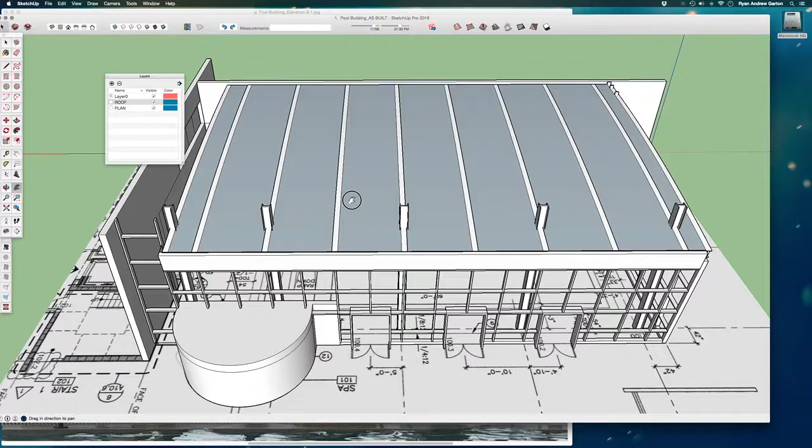Let's hide our roof by unchecking the roof layer. And now we can put the layers away for a moment.

So we're going to work on getting these exterior doors in place. And if we look at the photos, we can confidently say that all of these exterior doors are the same. We're not going to get into an insane amount of detail here, but we are going to make one door as a repeat component that we can use over and over again.

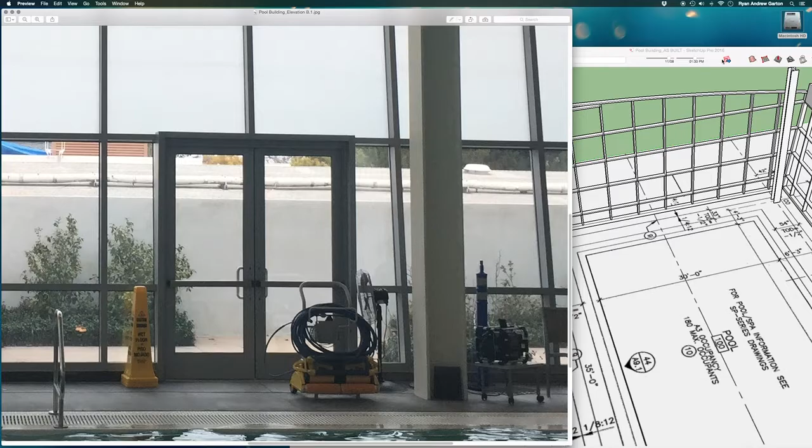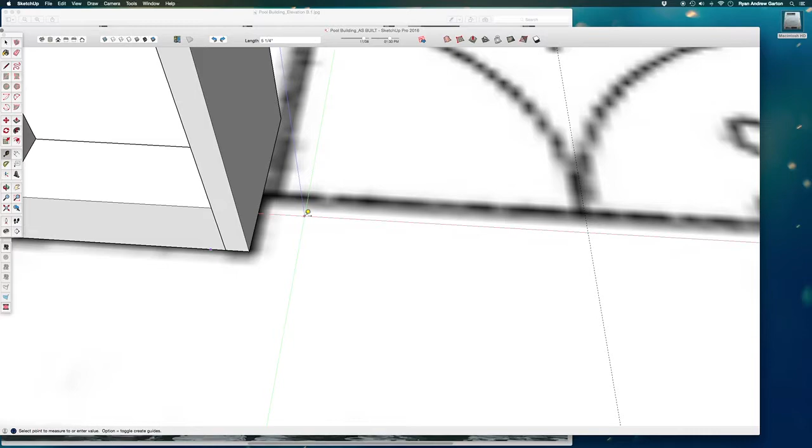So let's go back to our model, and we can just start at any point. I'm going to start with this door here. Using my tape, I'm going to pull a guide out 3 feet, enter. Then I'm going to use this line as a reference to pull a guide back, and I'll just say 5 1/4 inches. Let's go ahead and make the door 1 and 0.75, so 1 3/4 thick.

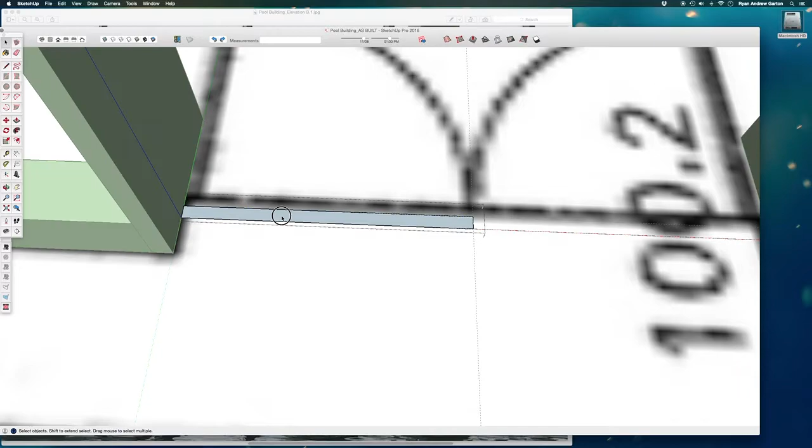Using the rectangle, go ahead and trace along that guide. Double click to select this, make it a group, and G. Double click to open it up again, P for push pull, and push pull this up into place.

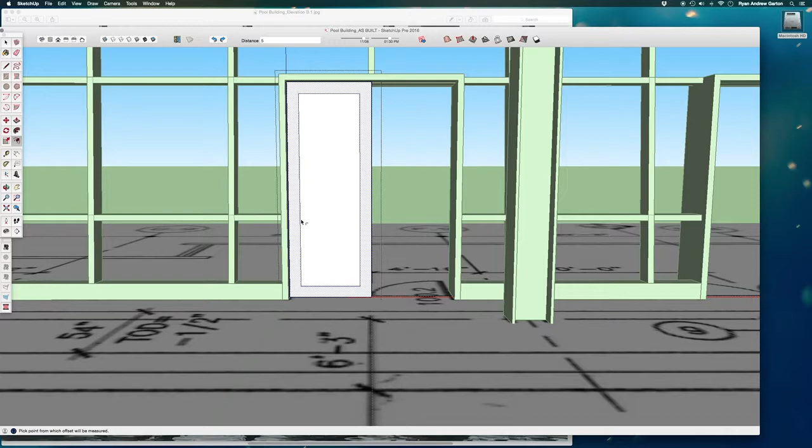Okay, now I'm going to open this up again, and I'm just going to offset this. I'm just going to do this visually because we've done a lot of work already. So let's make this 5. Select this line and just move it straight up, and we're going to move this up an additional 4 inches. Let's move it up an additional 5 inches. Notice I typed 4, enter, and I was still able to type 5, enter afterwards because I hadn't done anything else yet.

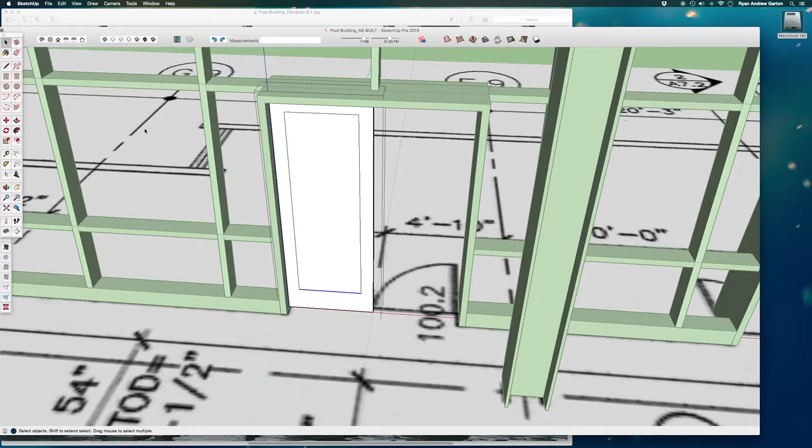All right, now we can push pull this away, click. Now I'm going to select, and that's done. So this is part 1. Now I need to put some glass in it.

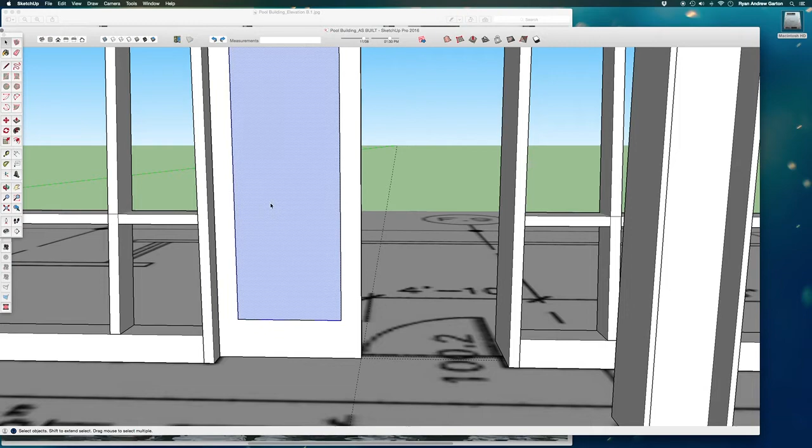So a rectangle from point to point. Double click on that, make that a group, and go ahead and move that in slightly. Let's just say 0.5.

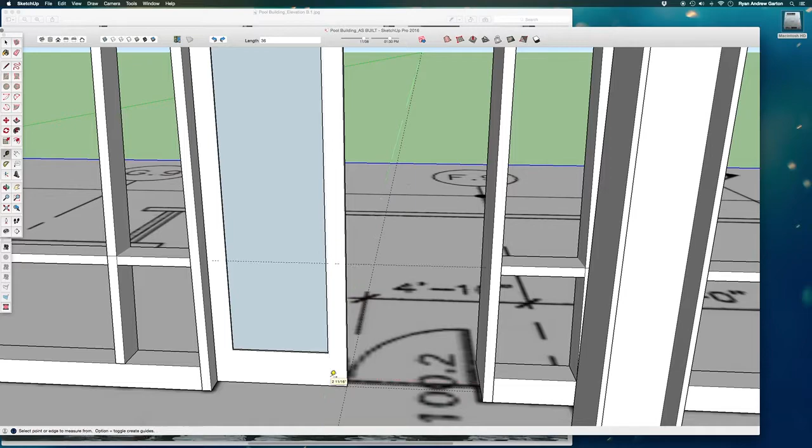Now I'm going to find my center line. I'm just going to graphically put a push bar in here. I'm not going to get really that invested in the detail of this. So I'm going to drag this up 36 inches. Let's do that again. 36, enter. So I've got a little line there. And I'm just going to eyeball along the center of that a rectangle. Double click and make that a group. Open that up, push pull.

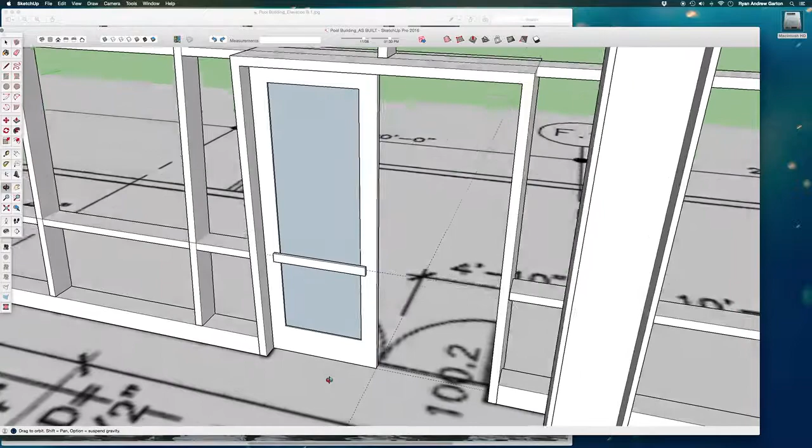Okay, that's basic. We're not worried about materials yet. We're going to get into that soon enough. So this is basically my door. I've got the frame, I've got the push bar, and I've got the glass on the inside.

The last thing I want to do, because eventually I want to see this model in plan, is give myself a little swing. I want to see what this looks like when I look at this in plan. I want to see the door swing. That's why I love this tool. There's these new pie tools and these new arc tools that are great for this.

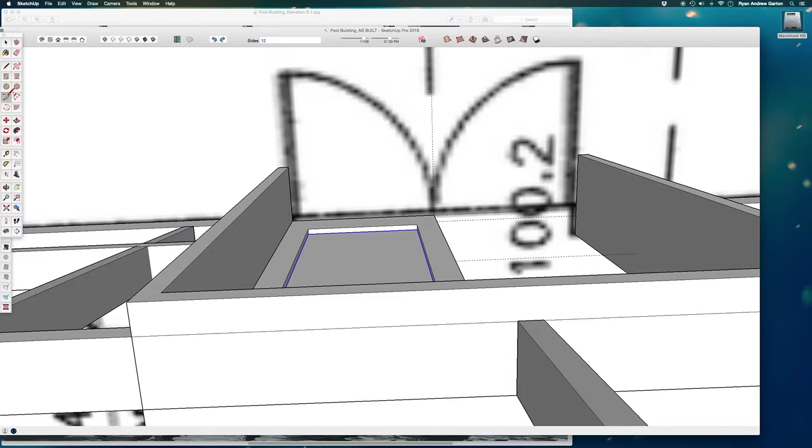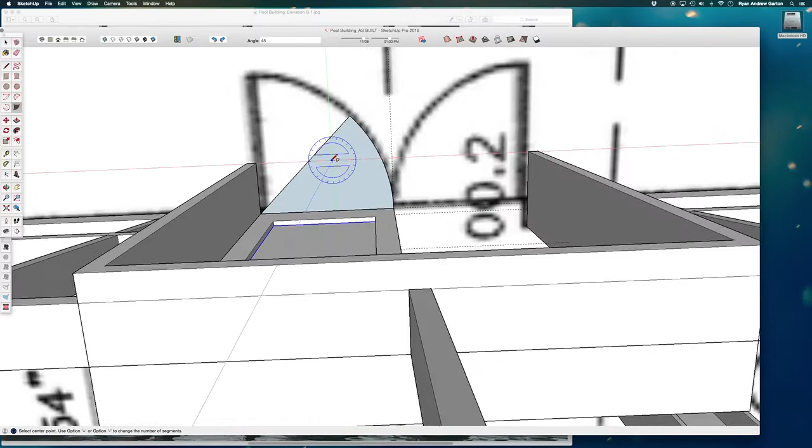So I'm going to select my pie tool, and I'm going to start from this corner along the blue axis, and I'm going to click again to this point, and I'm now able to move my mouse and type in 45. I personally like to see door swings at 45. It's totally a personal preference. Some people like 90, so you can decide whether you want to go all the way to the full 90 or the 45.

Double click on that, make that a group, and double click on it to open it up. I'm going to delete this line on the bottom and this face so that all I have is the line and the arc that shows the swing.

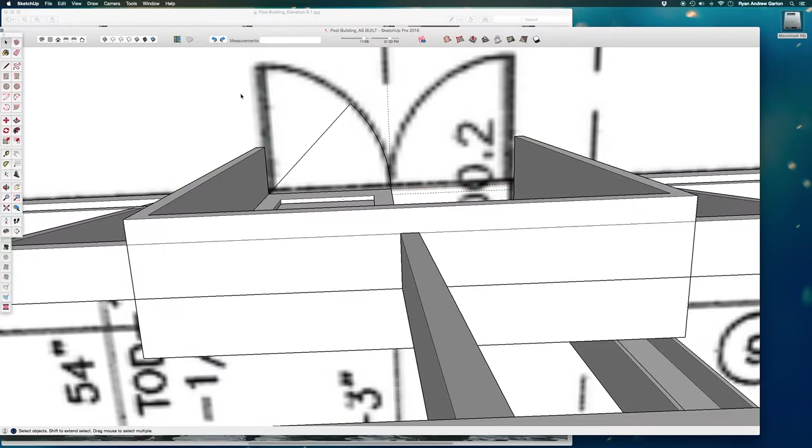With this selected, holding shift, I'm now going to select the glass, the push bar, and the frame, and I'm going to group it. Okay, so this door is what I'm going to use to repeat throughout the exterior space here.

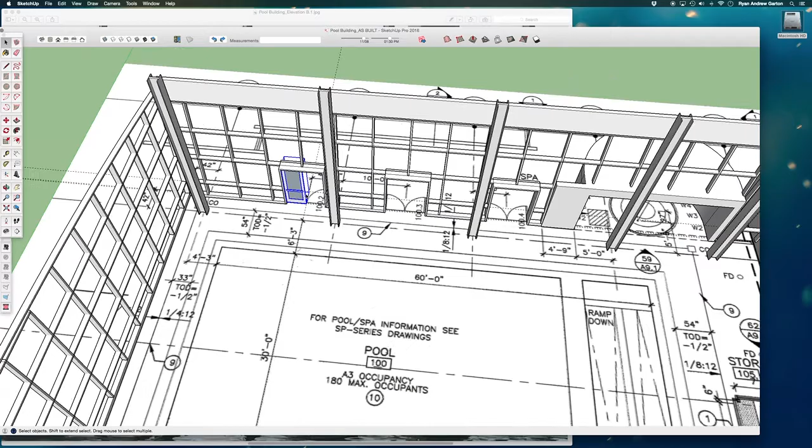I've got a set of double doors here, then 2 more sets, and 1 set of single doors. This door is going to repeat in a few different applications, so I want to right-click and make it into a component, so that whenever I edit it, it edits all of them, including if I open it up and start adding materials to it.

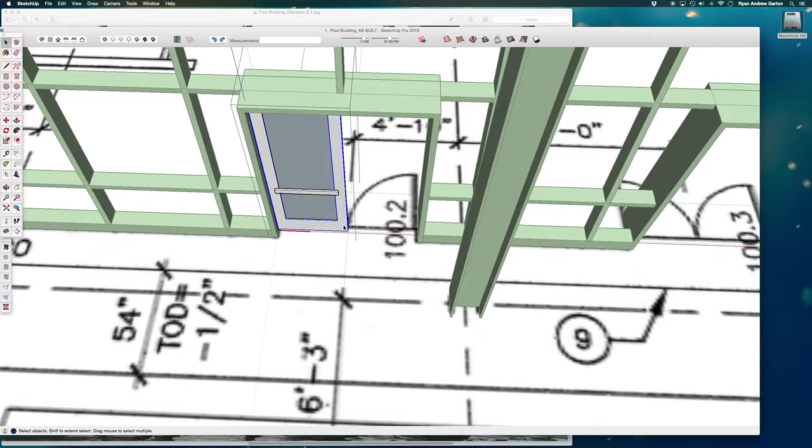Now that it's a component, I can copy it right next to itself. This isn't going to be as obvious if I do it from this side, so I'm going to come out to the outside and try something new: scaling in place to mirror in place.

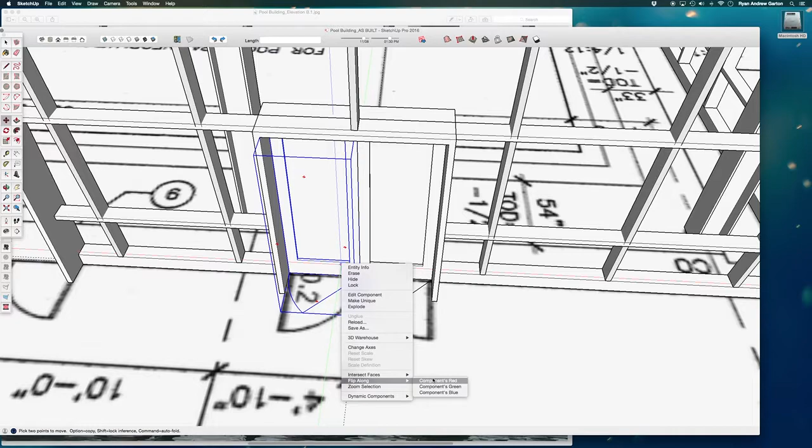This is instead of right-clicking and doing flip along red, green, or blue, which we talked about in the first class. If you flip along red, it flips it into place. I'm just going to undo that. If you flip along green, it flips it along the green axis like this. And if you flip along blue, it flips it upside down.

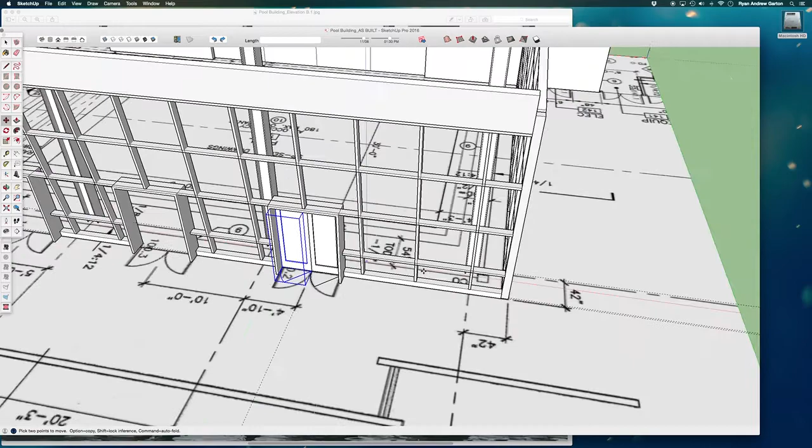That's really helpful to know, but I've learned that the more often I use SketchUp, I almost always choose red when I'm supposed to choose green, or green when I'm supposed to choose red. I can never keep up. So instead, I'm going to scale this in place and mirror it in place.

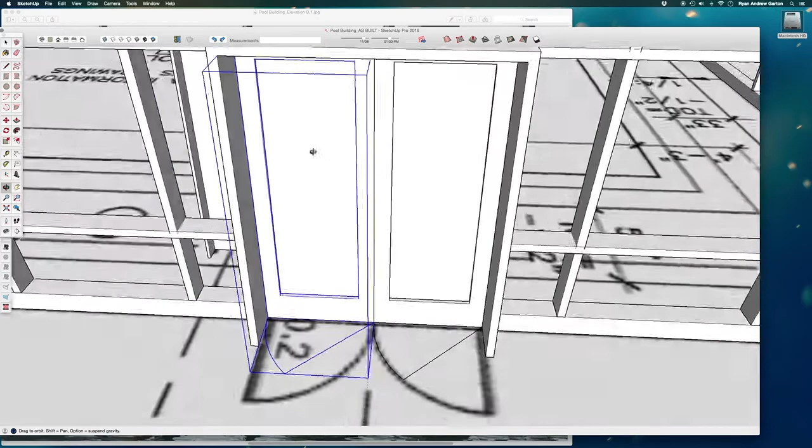I'll go to my scale tool, which gives me these classic scale points. I can scale it corner to corner, front to back which squishes it in on itself, or side to side, or using these weird side points which scales in two directions at once — I never use those. I'm going to scale from side to side, but hit down on this point.

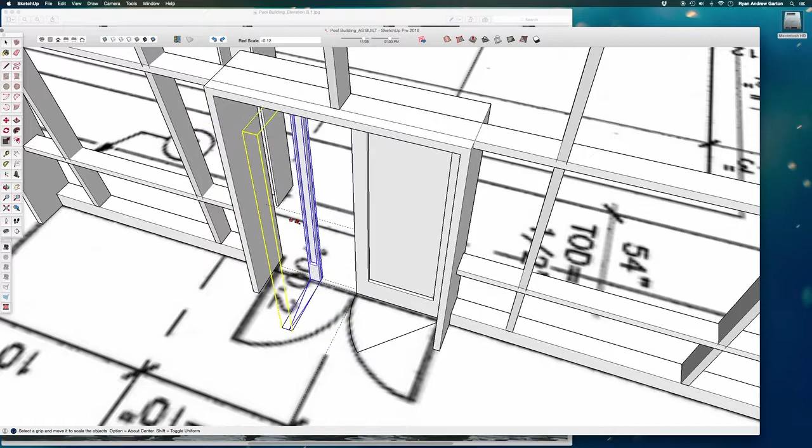I'm going to hold down my Control button if I'm on a PC, or Alt Option if I'm on a Mac — basically the same button you hit when making a copy. What this does is scale it in place on top of itself, or through itself. So I'm basically dragging it.

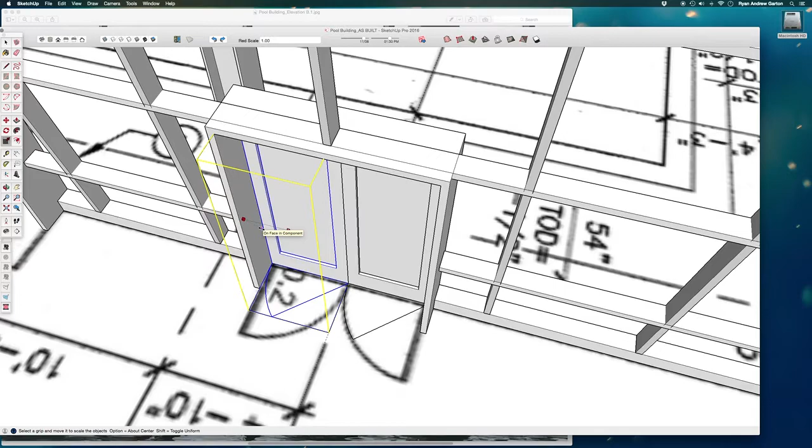Let's try that again. Escape. Starting that once more — I'm basically dragging it through itself and scaling to the other side. So the movement I'm doing with my mouse is pulling through till I touch the opposite point. Click. Now I have a nice set of double doors.

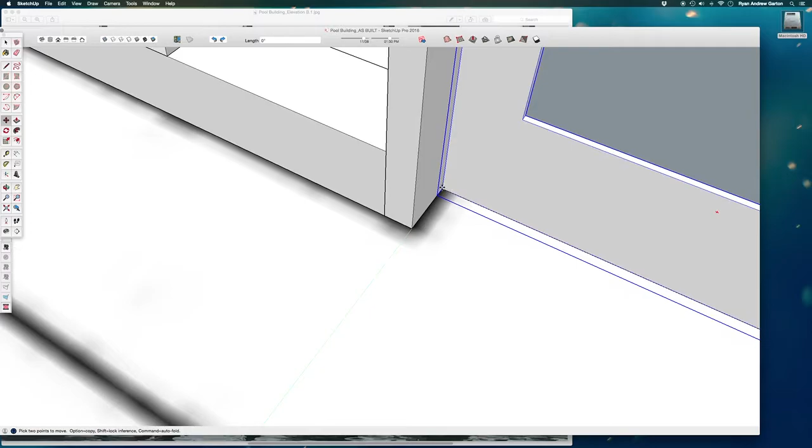Before I copy these double doors over to this side, let's bring a door over to this one here. Starting with this point, I'll go right into the inner point of this door, and make a copy. I'll drag that over to this point and click — though I shouldn't say drag, since that makes it seem like I'm holding down the left click. Just keep in mind, when I say drag, I basically mean move.

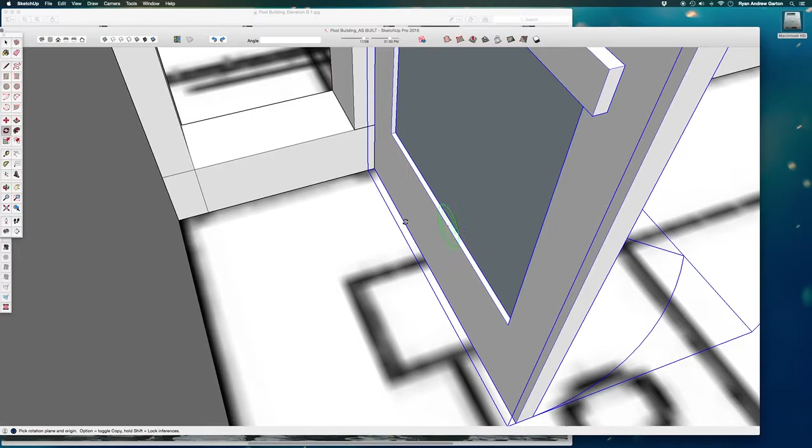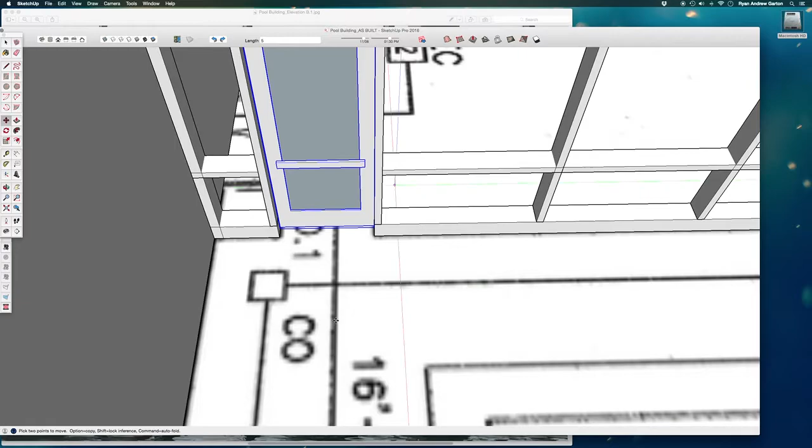Now I'm going to start from this point with my rotate tool, and click once on that line, once on this point, and rotate it into place. Click again. Then I'll move it back 5 inches. Great, so that door's now in place.

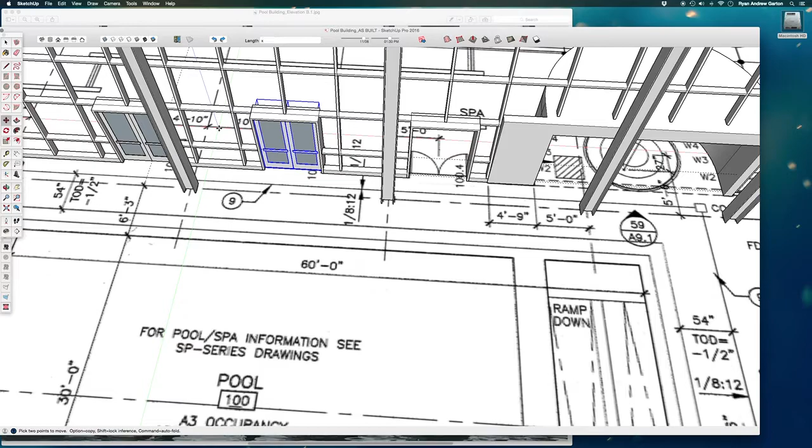With my select tool, I'll grab both of these doors by clicking once on each, and copy from this point to this point. Because we did this mathematically in a clean way, I should be able to type ×2, enter, and they should pop cleanly into place — which they do. Great, our exterior doors are now in place.